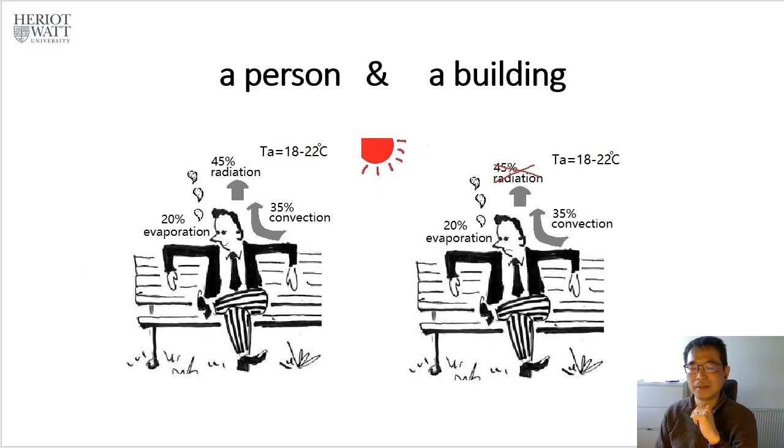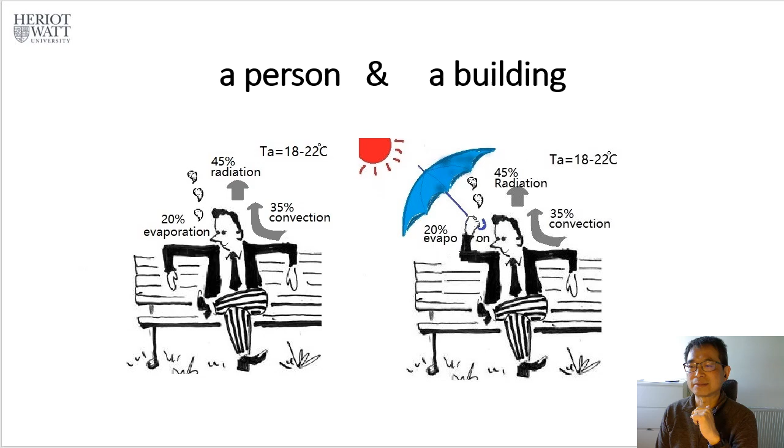If the environment changes, let's say there's a scorching sun, the radiation component will be greatly reduced, and the balance will be broken, and that will cause discomfort, even heat stress, like construction workers in road construction outdoors in summer. What do we do? We provide solar shading to regain the balance, and we can maintain a certain degree of comfort.

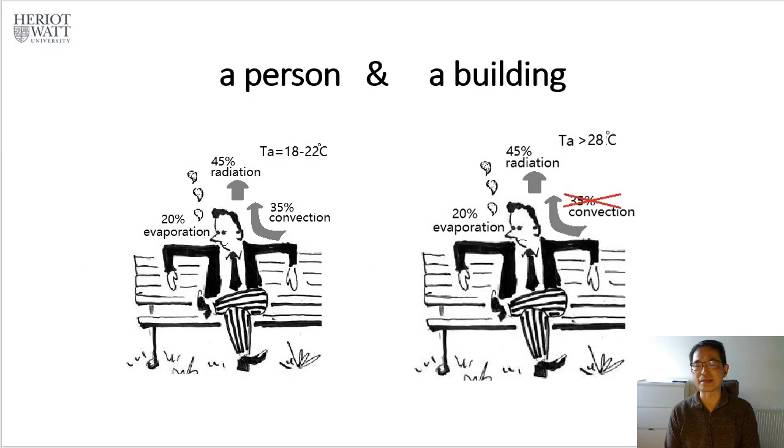Same if the temperature is very high, even without sun, then there's not enough convection to dissipate your body heat. Again, the balance is lost. So what do we do? We dress less and use a fan. So the air movement, forced convection, can increase convective heat loss, and then regain the balance, and you can still feel a certain degree comfortable. So this is when it's hot.

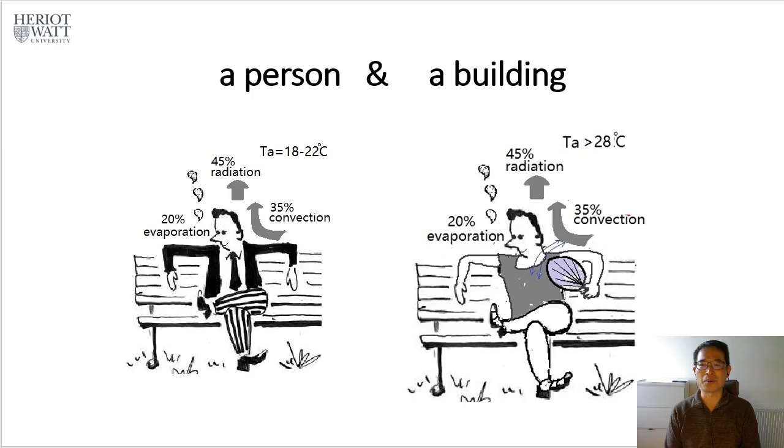Then imagine another situation when it's cold. Lower temperature surely means more convection loss, more evaporation loss, and again the balance is lost. And not only the balance, the total amount of heat lost is greatly increased. So to avoid this, we dress more. We wrap ourselves up to reduce the surface area exposed to the outdoor environment. So in this way, we prevent too much heat loss.

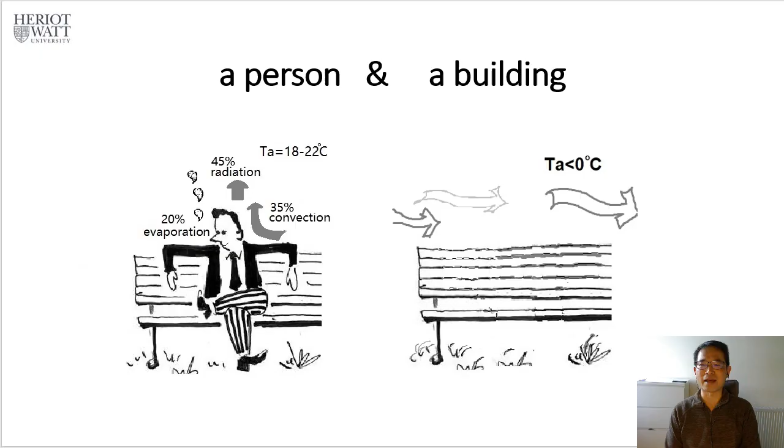If the wind gets stronger, then obviously we don't want to stay outside. We run away because otherwise we will lose more heat. For this reason, we have a responsive way to dress ourselves. So in summer, we dress less, and in winter, we wrap up more. So let's see, this is winter. We all wrap up. It's a sensible thing to do. And in summer when it's hot, we provide ourselves some shading, and we dress less to encourage heat loss. And we do all this same to a building.

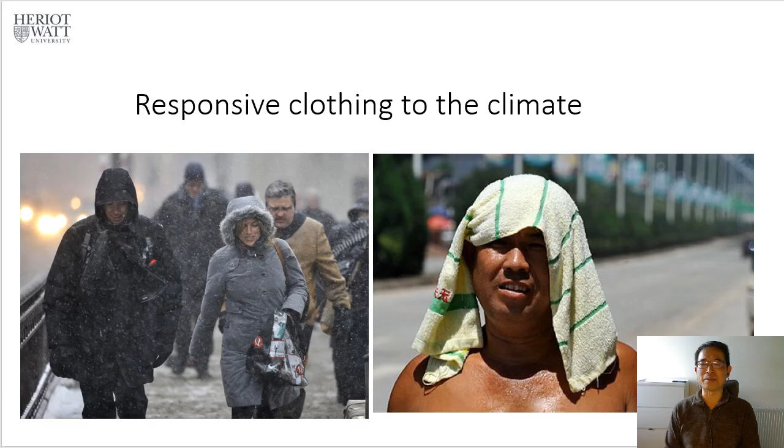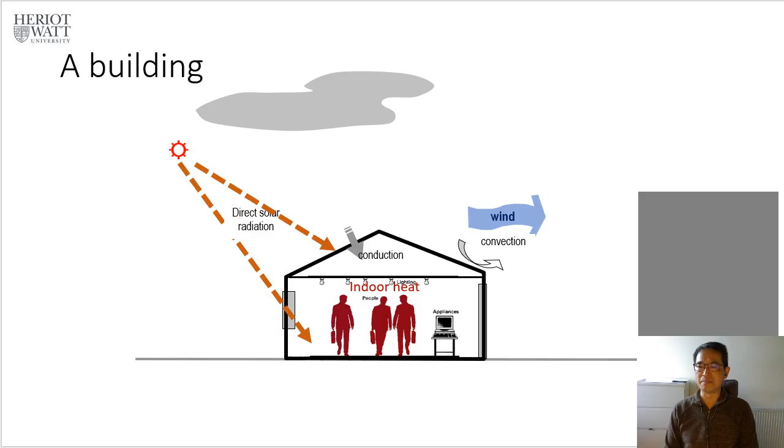Now let's look at a building. In a building, we also have some heat generated inside, and outside we have the environment. So you can see the major thermal force is from the sun, and the other is wind. Sun can penetrate through the window into the building, and it can also heat the surface, and then by conduction, heat goes into the room. And the sun also reflects from other surfaces into the building. So that's the major heat going into the building.

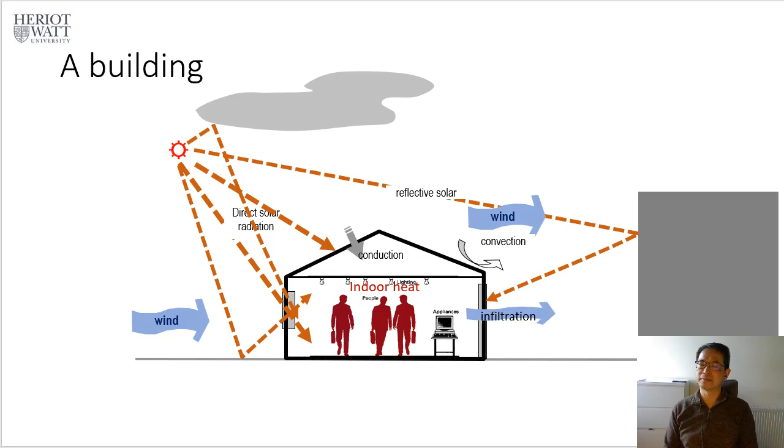And the wind will infiltrate into the building and then remove the heat. So this is how a building releases heat. If there's a certain amount of heat release, then temperature can be maintained at a comfortable level, for example, about 20 to 24. Now, if too much heat is gained, then it'll be discomfort. And if too much is lost, then temperature will drop and it's too cold.

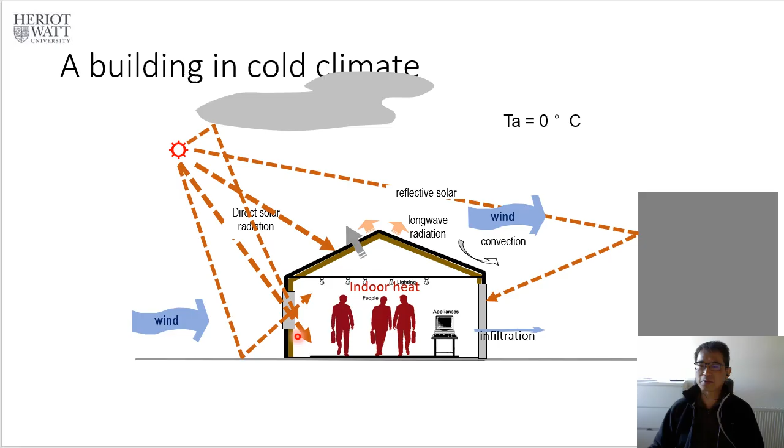So in a cold climate and in winter, outdoor temperature is low. Just like a human being, the building needs to be wrapped up to prevent heat loss. So we have an insulation layer, and we also allow windows to let sunlight come in, so there's solar heat. And we also seal all the small gaps around the windows and the doors and elsewhere to reduce infiltration.

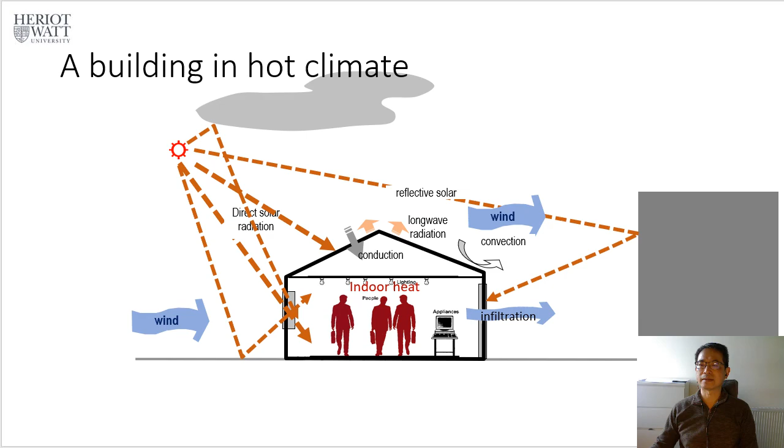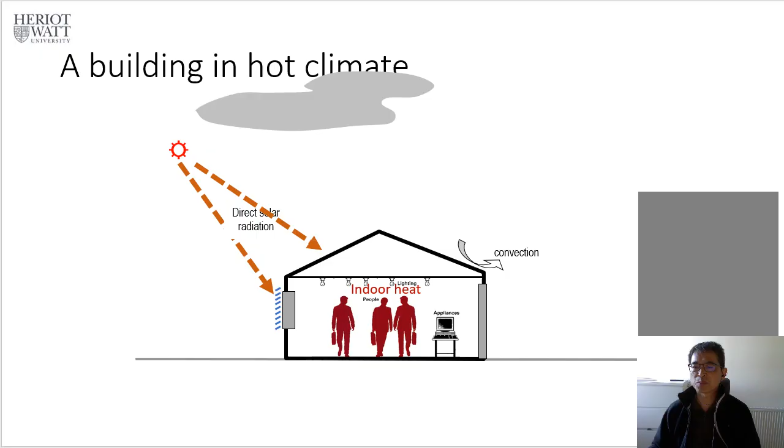And in a hot climate and in summer, we do something to prevent outdoor heat going into the room. We use solar shading to prevent solar penetration into the indoor environment. And we also open up windows and doors to allow wind to go through the indoor space. We call this natural ventilation to remove heat. And we sometimes also have vents on our roof to allow further ventilation to take heat away.

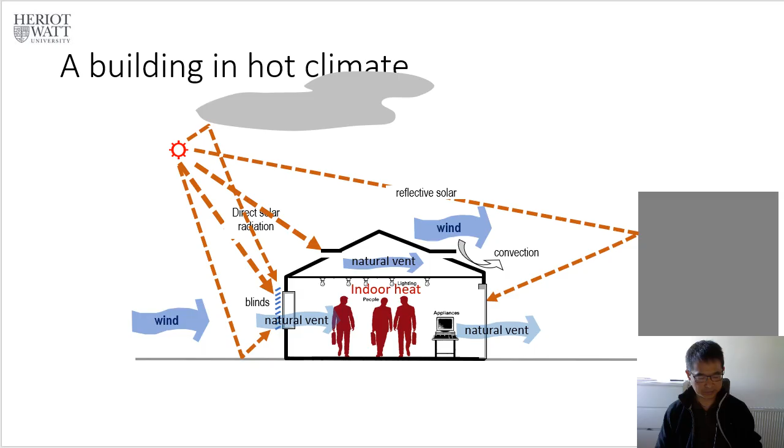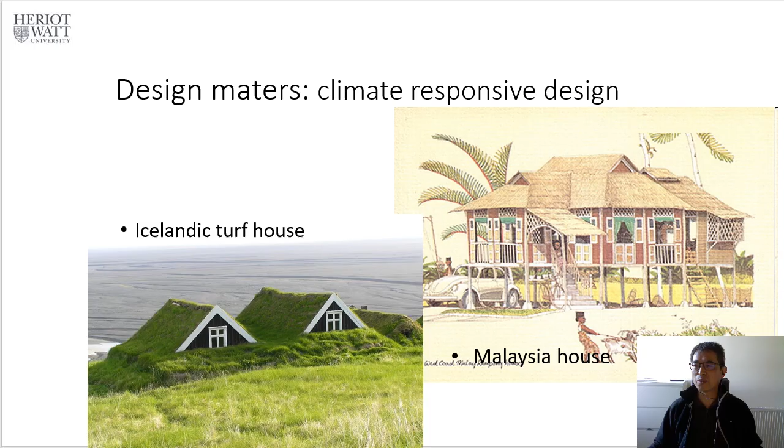Over generations, people developed their vernacular architecture and they designed climate-responsive buildings. Here you can see in a cold climate, people bury the buildings halfway into the ground, so they expose less to the cold air. This is to prevent too much heat loss. And in a hot climate like Malaysia, the buildings are very open, with solar shading, big eaves to prevent sun going into the room, and they're all very open to the wind to take away heat.

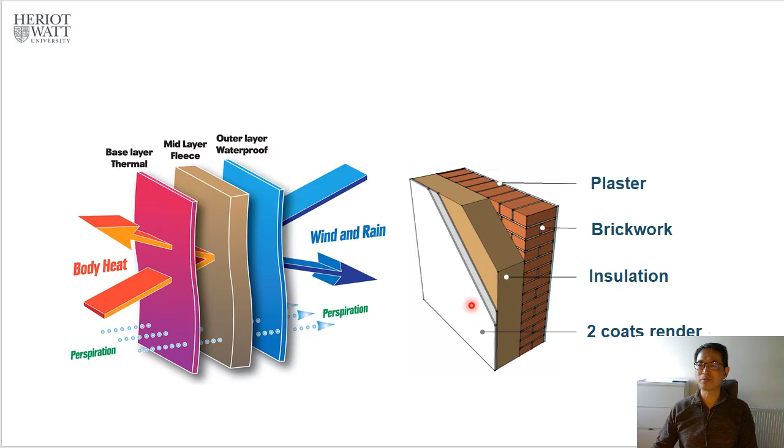Fabrics. Talking about insulation, we can see these are clothes. We have layers, and the same in buildings. We have different layers, some to provide structural stability, like the bricks, and we have an insulation layer, and we have a coating, just like the outer surface, for good aesthetic effect. We are familiar with heating systems in cold climates and air conditioning cooling systems in hot climates, and those systems need energy. A good building fabric can help us reduce the energy consumption for running these systems.

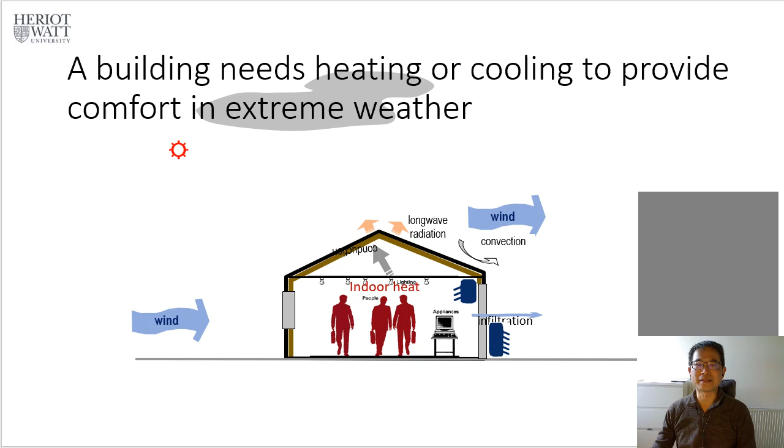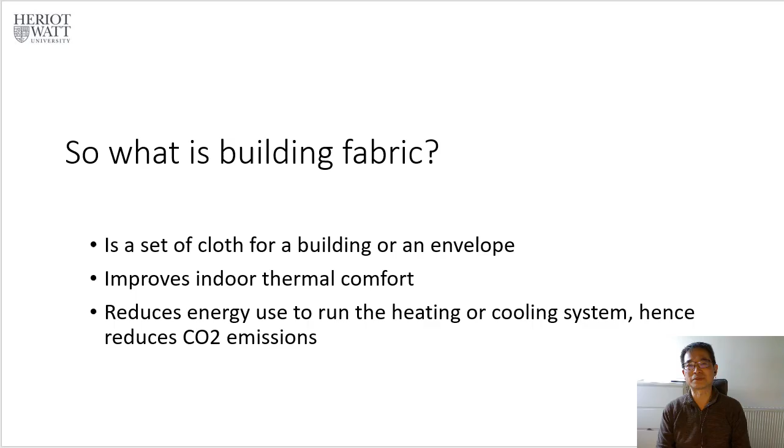So, to sum up, what is building fabric? It is a set of clothes for a building, or it is an envelope. It improves indoor thermal comfort, and it also reduces energy use for cooling or heating, and therefore it reduces carbon emissions from our buildings.